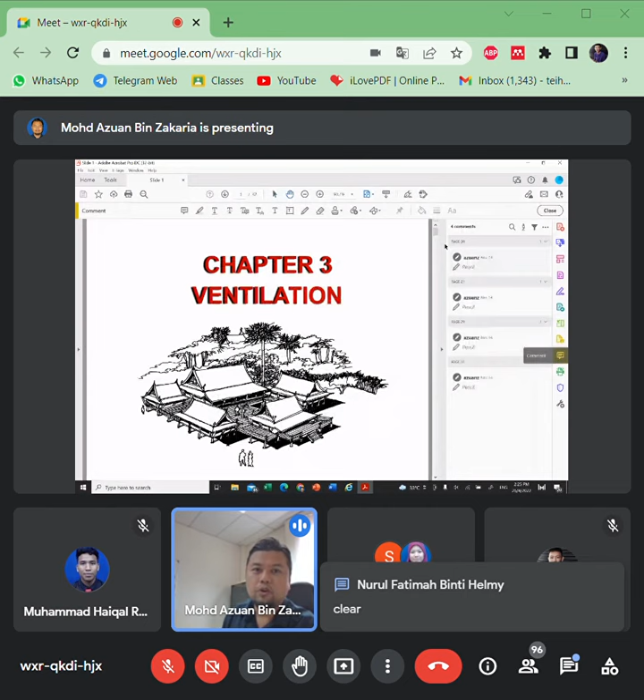Okay, chapter 3, what you have to know is basically about, if you already see the video, is okay, maybe you have the clue sikit. Chapter 3 kita ada 3 sebenarnya: indoor air quality, natural ventilation, and mechanical ventilation. Plus inside mechanical ventilation, we will learn briefly about air conditioning system. Hopefully you can do revision between today or tomorrow evening, these two lah.

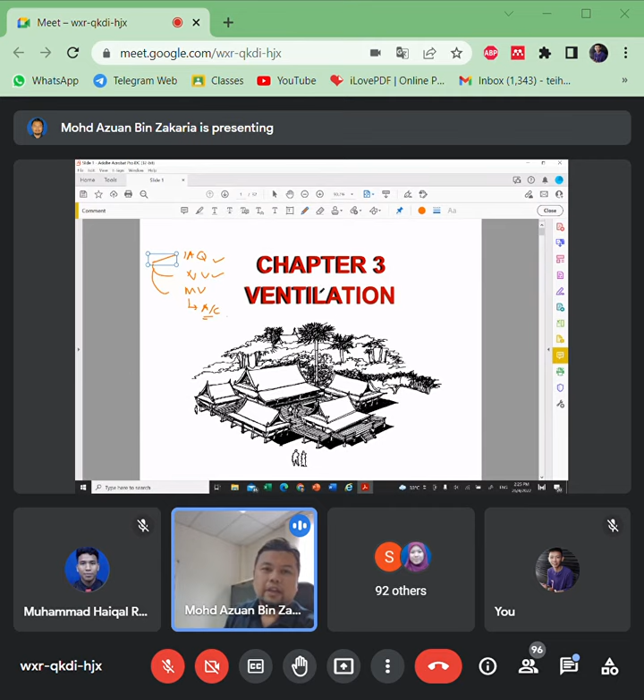Okay, I go through briefly about indoor air quality. As I mentioned before, we as humans need a building as an envelope, a tempat perlindungan. But when we live in the building, what we want to do is make sure we have a comfortable and healthy life. We want to be comfortable and healthy.

One of the factors that can ensure we are healthy inside a building is the air quality of indoor air. The quality of indoor air will affect your health. Therefore we need to make sure the IAQ or indoor air quality is very good, to make sure it will not bring side effects to us, because normally we will stay for a longer time. You can try to calculate how many hours you stay in a building, more than 8 hours per day, or in a specific room maybe more than 5 hours. So if you are exposed to not good or polluted air for a long time, it will affect your health, maybe your skin, for example some irritation, maybe the air has some toxic. So we need a good indoor air quality.

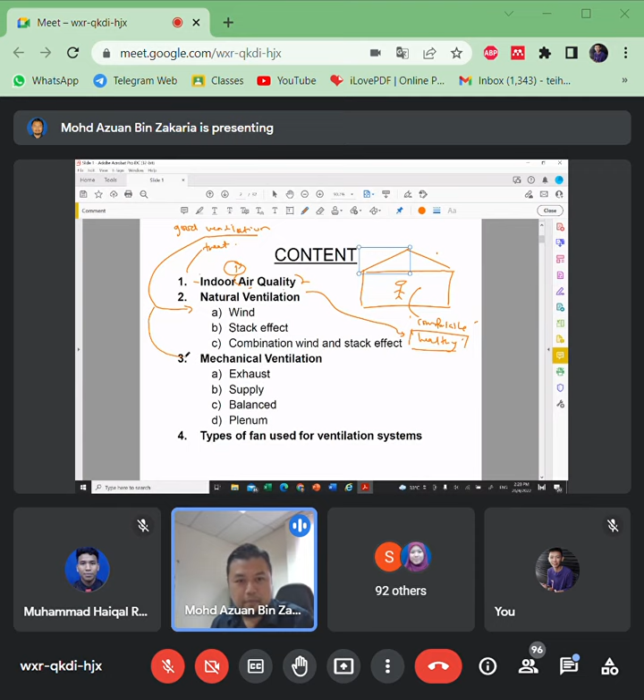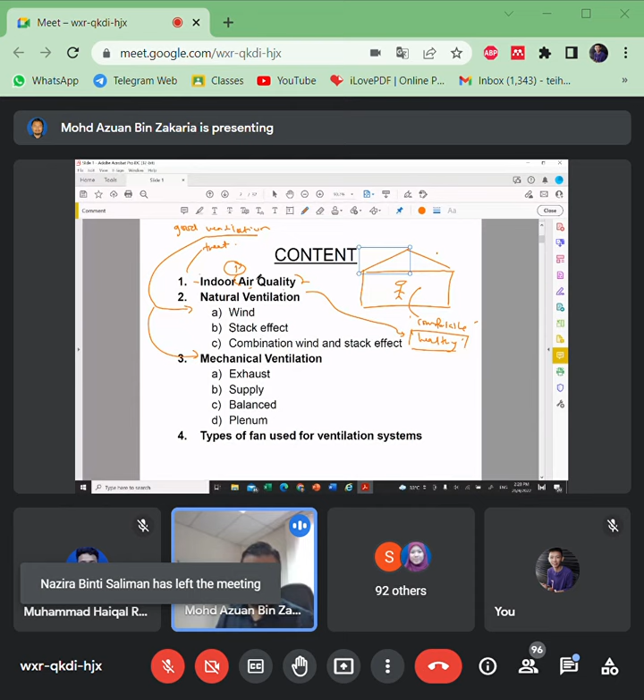That's number one. To provide good indoor air quality, of course we need to treat the air, and also we need a good ventilation, to remove the pollutants. Meanwhile, ventilation itself we can obtain by two methods: natural ventilation or mechanical ventilation. So now you understand the purpose of ventilation, to provide good indoor air quality. Today we will go to natural ventilation first.

Okay, the importance of ventilation. Firstly, to maintain thermal comfort, as mentioned before, control of thermal comfort is related to indoor air temperature and relative humidity. Number two, to provide fresh air for your health. And lastly, an additional function of ventilation is it can cool the building mass and interior space.

Ventilation is for thermal comfort, for fresh air, and at the same time, if the air flows towards the building structure, it can remove or release some heat. So some heat can be removed by ventilation, and therefore it can be used to cool the building mass.

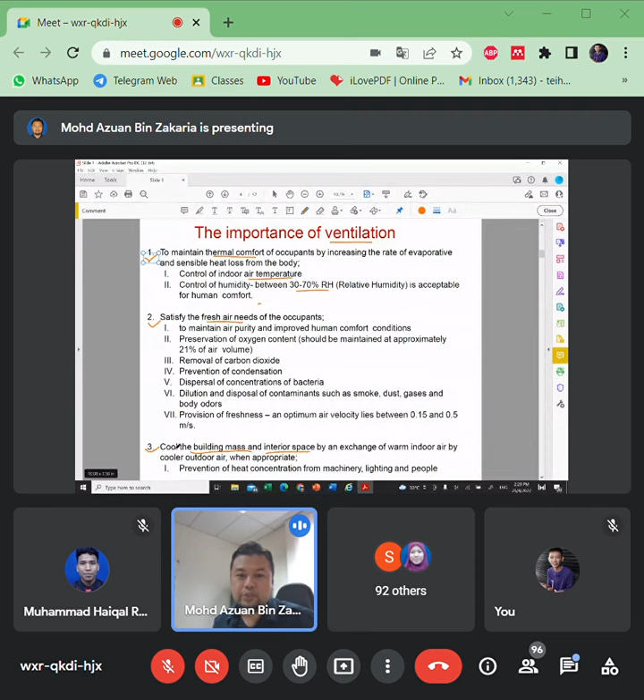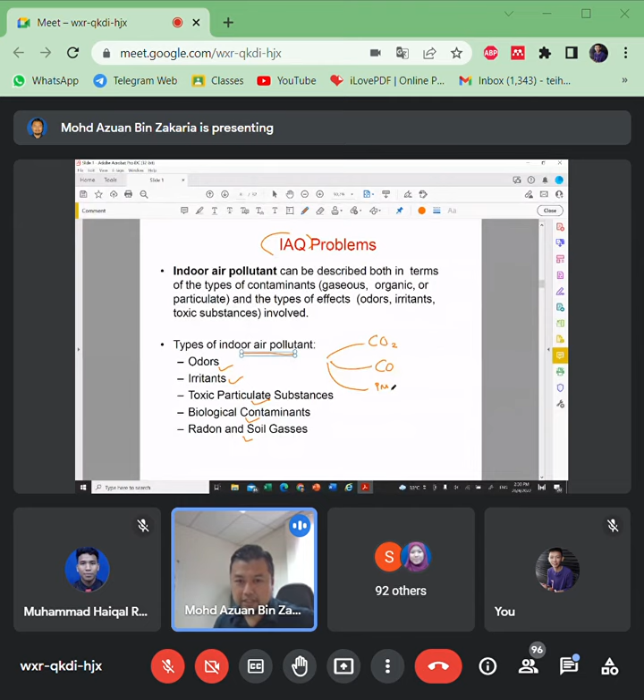Indoor air quality is normally affected by indoor air pollutants. This can include odors, irritants, toxic particulate substances, biological contaminants, radon gas, or other parameters we always check in IAQ, such as CO2 level (carbon dioxide), carbon monoxide, and particulate matters like PM10, PM2.5, and PM1.0. There's also VOC level, and many others.

So indoor air quality, only... okay, good, yes.

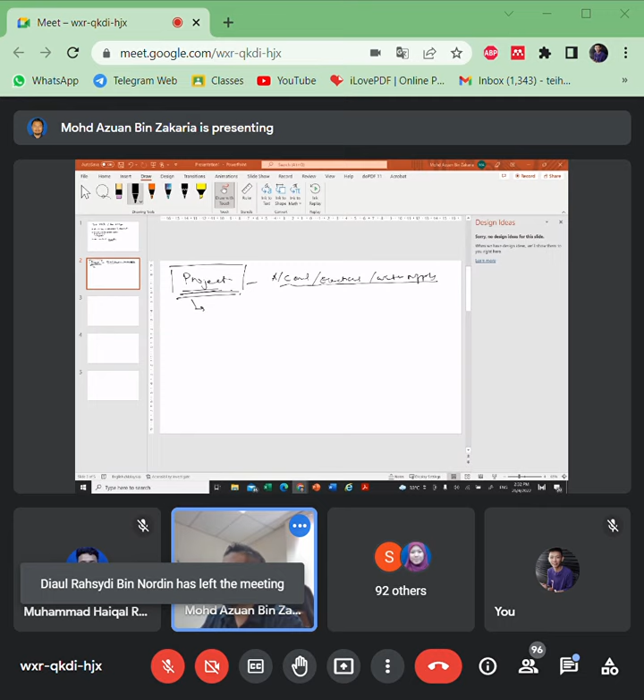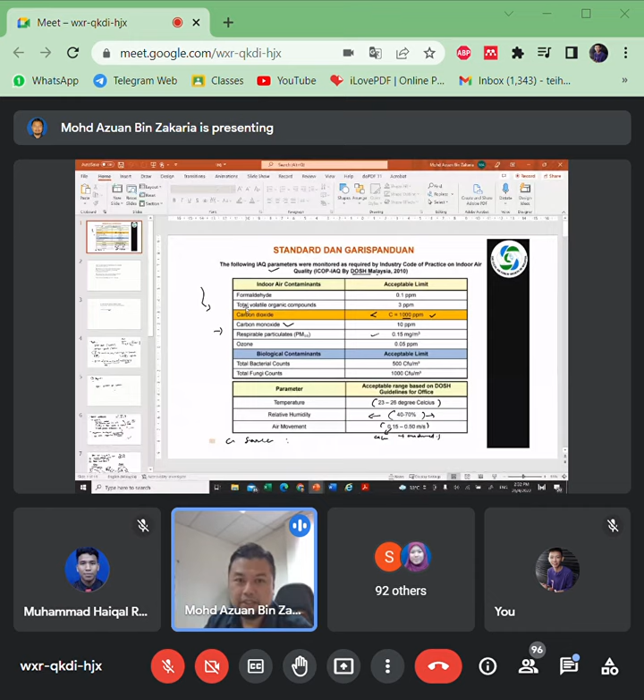This one. So we are talking about indoor air quality, which is caused by indoor air contaminants. Every indoor air contaminant or parameter has its limit. For example, CO2 has a limit, and VOC, volatile organic compounds, has a limit. This example is by DOSH Malaysia.

If you're interested to observe the level of pollutants, maybe you can purchase some sensors. Normally, let's see, carbon dioxide recommended is less than 1000 ppm, parts per million. What is normal outdoor CO2 level? If you have a sensor, some labs have sensors, normal outdoors is around 400 to 500.

Normal, if using natural ventilation, maybe 500s. Then, because of human activity, human respiration, and some equipment, indoor CO2 levels may slightly increase, slightly higher than external, but we have to control this to be less than 1000, because more than 1000 it will affect health - for example feel tired, dizzy. If exposed to more than 3000 ppm CO2 for more than 5 hours, the person may become nauseous, dizzy, pening kepala. This is also a cause of sick building syndrome.

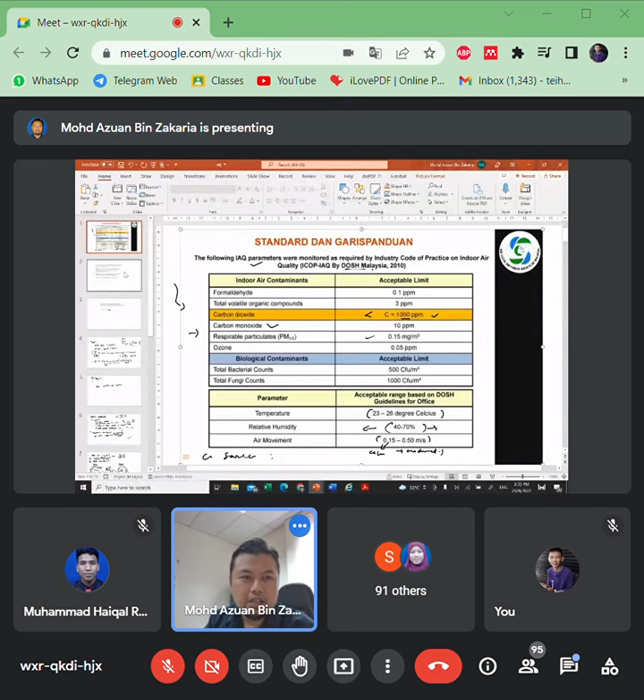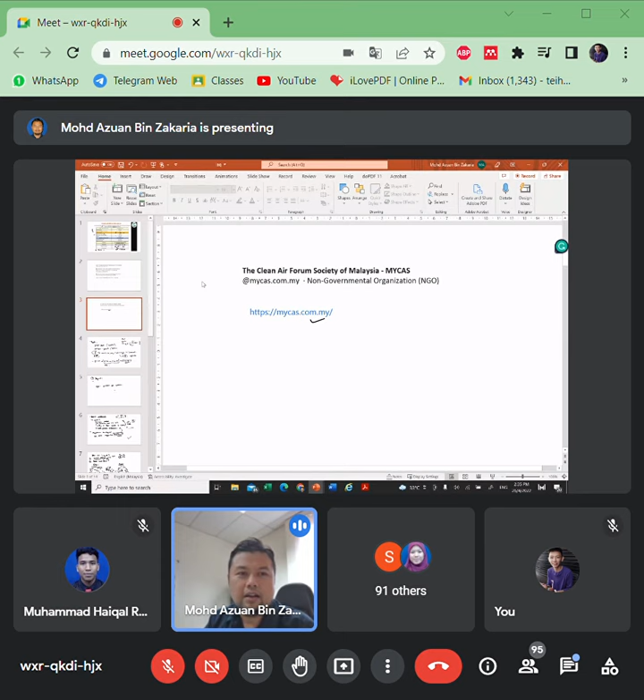Okay, let's continue and look at the main categories: odors, irritants, and so on. Odors are unpleasant smells. If too much, it can come from humans, grooming products, copy machines, and so on, making us feel uncomfortable. One solution is to increase outdoor air supply - we need fresh air supply.

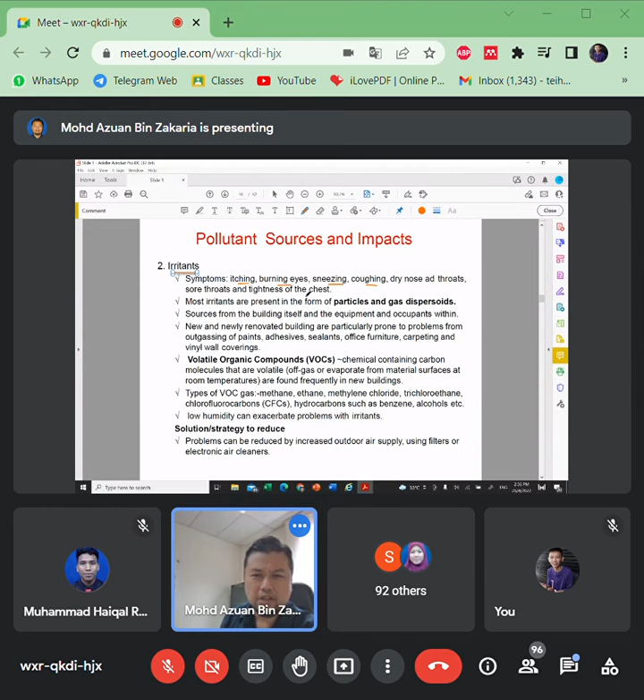At the same time, the internal air should be removed. Then irritants: symptoms include itching, burning eyes, sneezing, coughing, dry nose, sore throat, and so on. Most irritants present as particle and gas dispersoids, normally small particles - particulate matters. Depending on size, some particulates can go into our nose, eyes, and so on.

One of the particles is VOC, which is a chemical containing carbon molecules that are volatile - toxic chemical gas, not healthy for our health. It can evaporate, which is volatile, from material surfaces at room temperature.

Frequently found in new buildings because of paint, or from furniture, or from perfume. The problem can be reduced by increasing outdoor air supply, using filters, and electronic air cleaners.

Then we have another thing: toxic particulate substance. Some materials have toxic particulate substance, such as previously the introduction of asbestos. Asbestos has already been banned worldwide - it should no longer be used for commercial and residential purposes, because asbestos has toxic particulate substance. However, still in Malaysia, I believe there may still be illegal sale, or some shops where asbestos products are still available.

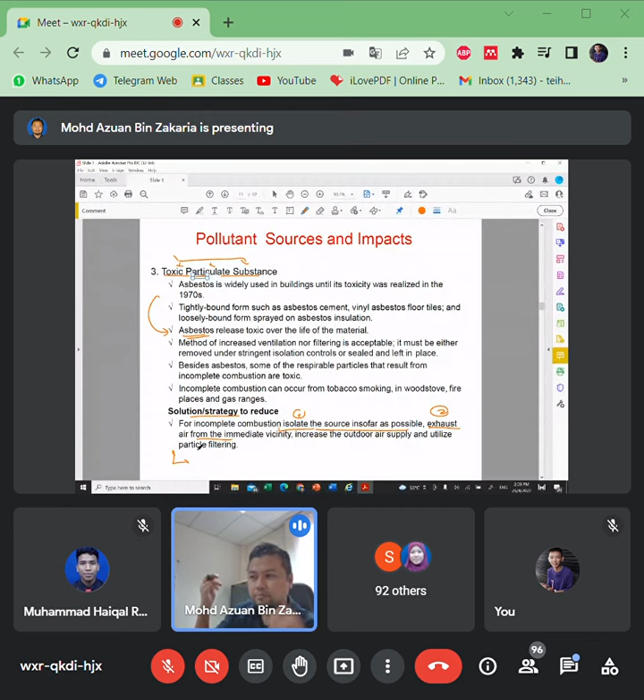Just in case, if you find some videos on how to deal with asbestos outside in different countries, they even use full PPE to remove asbestos.

Next, biological contaminants such as bacteria, fungus, virus, algae. These biological contaminants are normally related to humidity in the building, because of moisture. Virus and fungi will thrive in conditions where RH is more than 70%. 70% RH and above is a good place for them to grow.

Mold and so on. So one of the strategies to reduce these biological contaminants is to make sure the RH should be within the recommended range, maybe 40 to 65% RH.

Number 2, exposure to ultraviolet radiation. Recent technology lets you use UV light to kill fungus, virus, and algae, but you need to read the instructions, because for the usage of UV light, we need to know how many times of exposure is required. It's not like you just expose it to UV light for 1 second and remove it. You have to read.

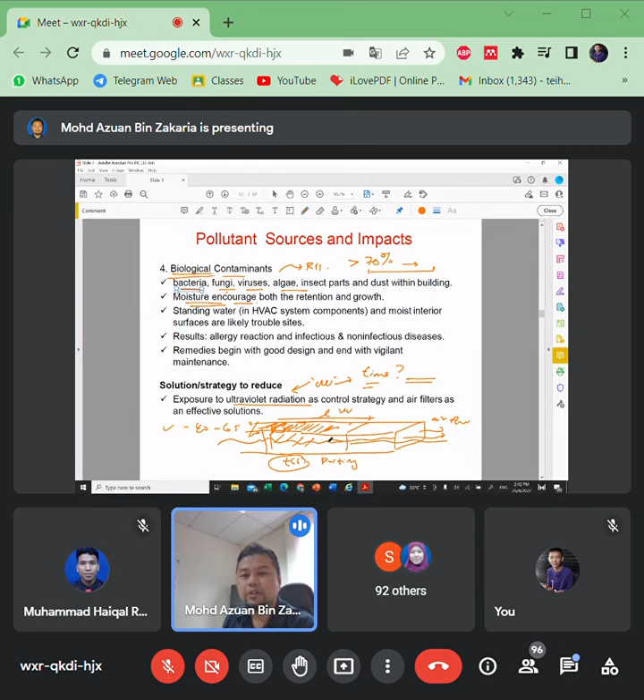How do you expose the air for a certain time? They need to provide a certain length of UV light, so that when the air travels through, it travels for some time before it can be released. So this time is required - how much length is required for the air to be treated, so that the required time is achieved.

Last but not least is radon and soil gas. Honestly, I'm not so familiar with this, but they say radon - some dangerous gas - is released underneath the ground. We need to be careful to check whether the underground level has some source of pollutants or not. Radon is a radioactive gas that decays rapidly, releasing radiation at each stage.

It's colorless and odorless, so we need to prevent it. To prevent penetration from below ground, the space, wall and floor should be both minimized and well sealed. So basically, if there is ground and a house, we need to make a very good seal, and provide prevention layers between the ground and the building.

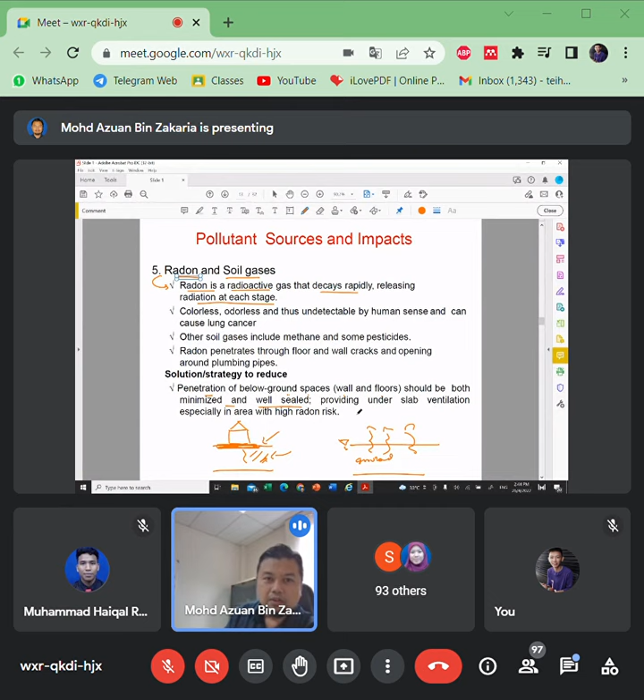This applies if we have no choice but to build the house or building on polluted ground. That's basically a brief overview about indoor air quality pollutants. So what we have to do is make sure all the contaminants are within the allowable range, to control them.

So there are many strategies, for example improving ventilation, the arrangement of the room, and reducing the density of people inside the room. There are many strategies, but to discuss specific strategies, we have to further check journals or standards.

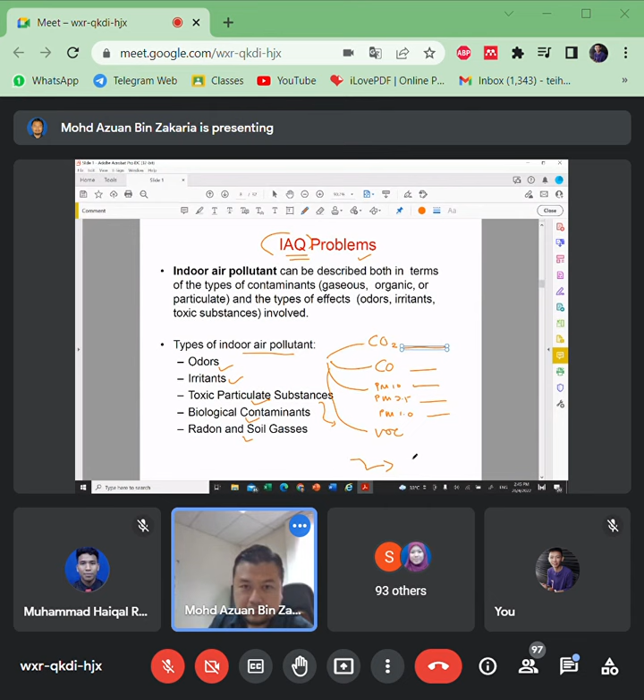Second thing we have - alright, 45 minutes left, maybe 30 minutes left. Let's look into natural ventilation.

Is there anyone who wants to share what you understand about natural ventilation?

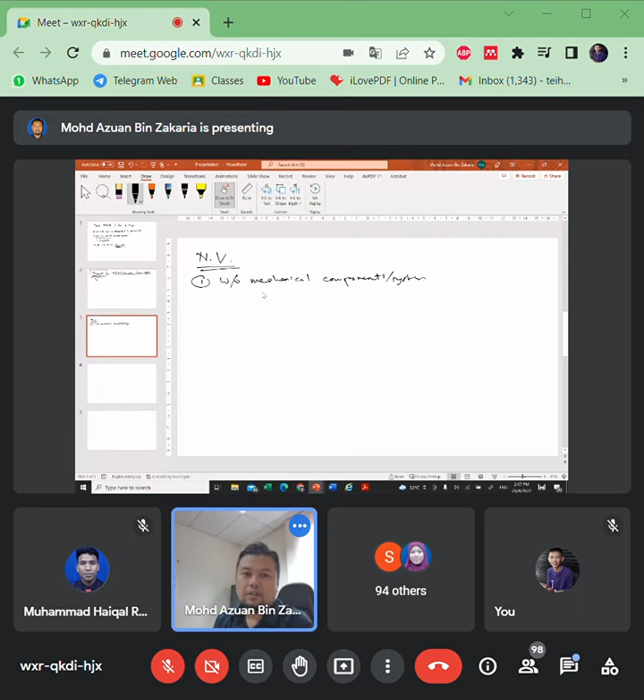So we have: without using a mechanical system. Natural wind. So natural ventilation firstly is without mechanical components or systems. Number two, if it's natural wind.

And then there's weathering - weathering, correct, lulu hawa. And then we have pressure difference - good, pressure difference, flow of air due to pressure difference. We have two votes: external air, fresh air from external. Okay, I think you're already okay.

Very good, very active. So we have several answers, I think it's enough to be discussed. Okay, so basically, in my opinion, we can give two keywords.

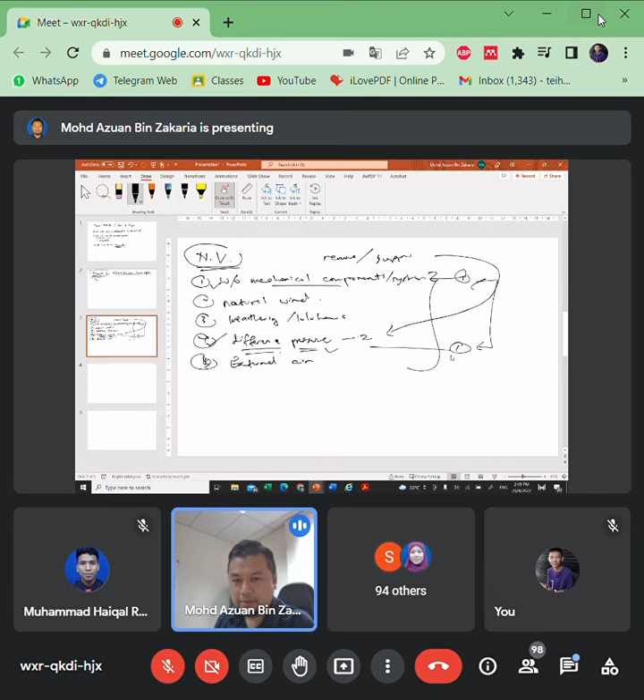So thank you for your response. I can say that one keyword is to remove and supply air without mechanical ventilation. Then the process itself is based on pressure difference. So without mechanical ventilation, but the process is caused by pressure difference. For me, natural ventilation is ventilation caused by the pressure difference inside and outside the room. These two keywords I can accept, but for me the best one is this - pressure difference.

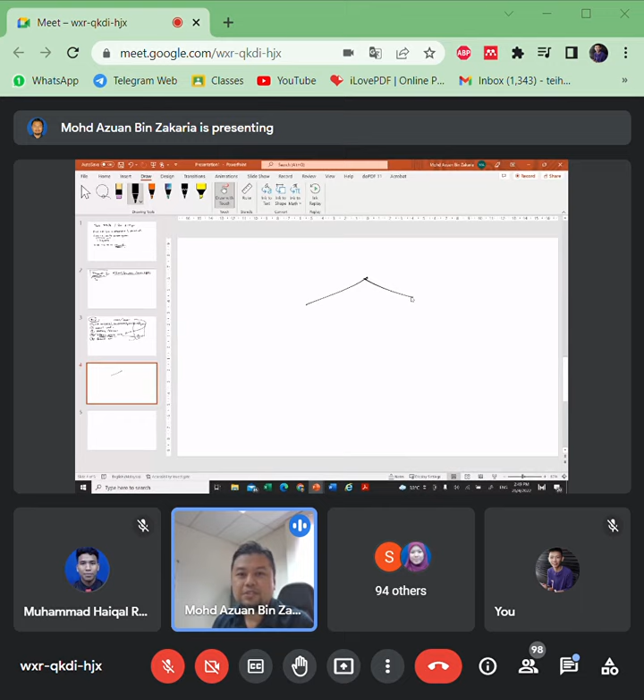Natural ventilation happens due to pressure difference, because as I mentioned in the video, because of the difference in pressure, the air can flow. As I mentioned before, if we have a house, to make sure the air can flow inside, we need to make sure the pressure outside is bigger than the pressure inside. If pressure outside is equal to pressure inside, there will be no ventilation. Even though the outside air is very strong, if the pressure inside the room is also very strong and creates equality, there will be no ventilation.

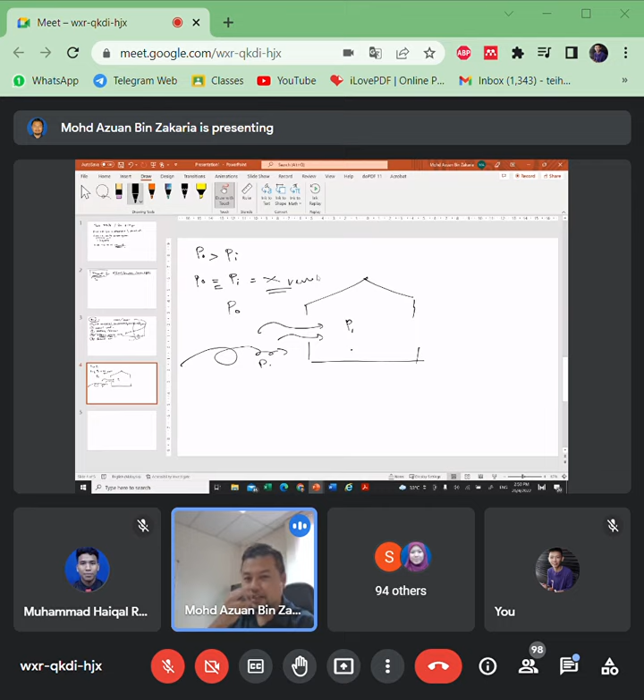So this pressure difference is by wind force, right? By wind force. There is another thing - pressure difference by temperature. How does pressure difference get affected by temperature? This is related to stack effect. As I mentioned in the video, stack effect normally happens in very tall buildings.

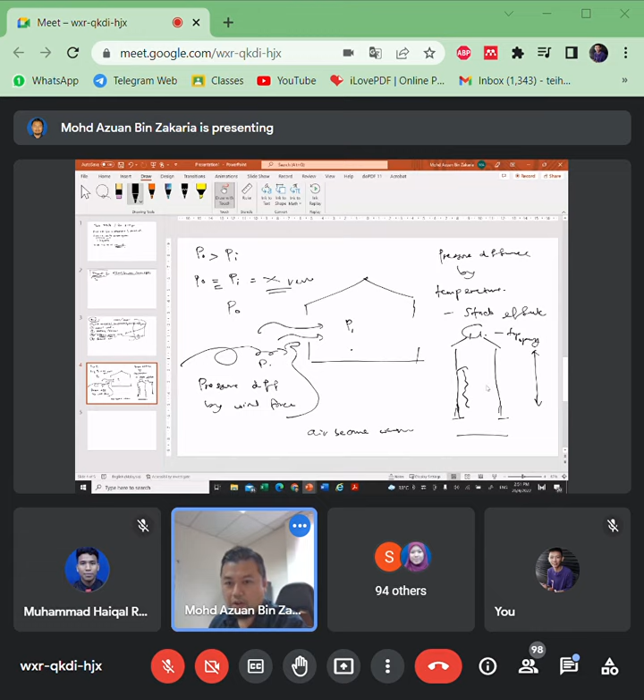If a tall building has an opening at the top - a tall building with an opening at the top - this can create stack effect due to pressure difference. Because, as I mentioned before, when activity happens, the air inside becomes warm. The warm air, having less density, will rise up. Then cool air, for example from outside, will come in - when the warm air rises, it leaves some empty space, meaning the density there is low, so the heavier air can go inside.

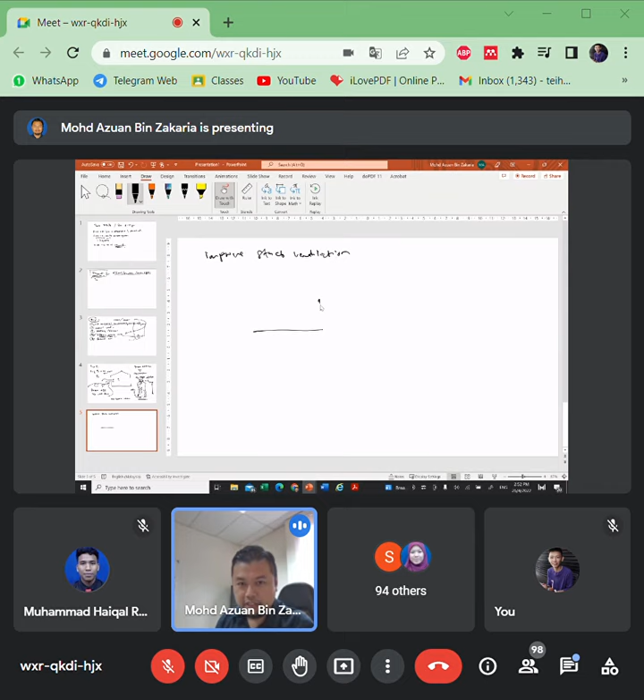So slightly cold air comes in, and the hot air, if we provide some opening up here, can be released. There are some strategies to improve stack ventilation. Because of the difference - sorry, let me draw this - stack effect: some activities happen, so stack effect happens. Imagine stack effect happening here, caused by temperature difference.

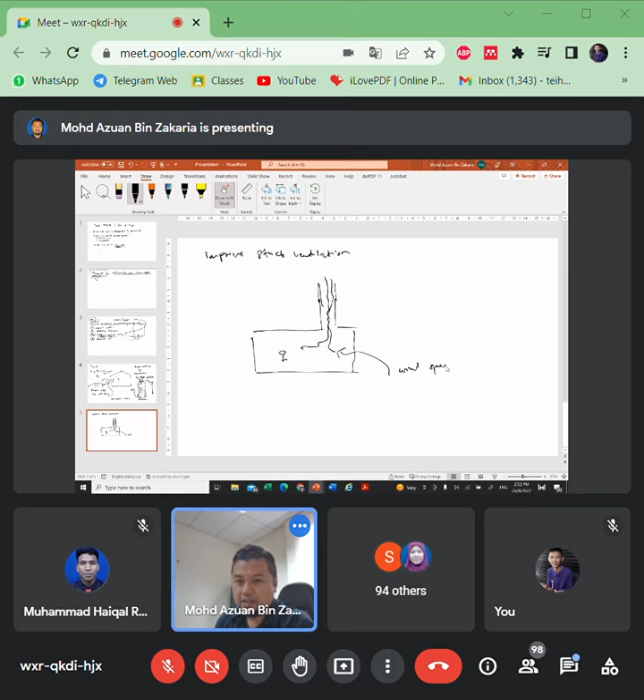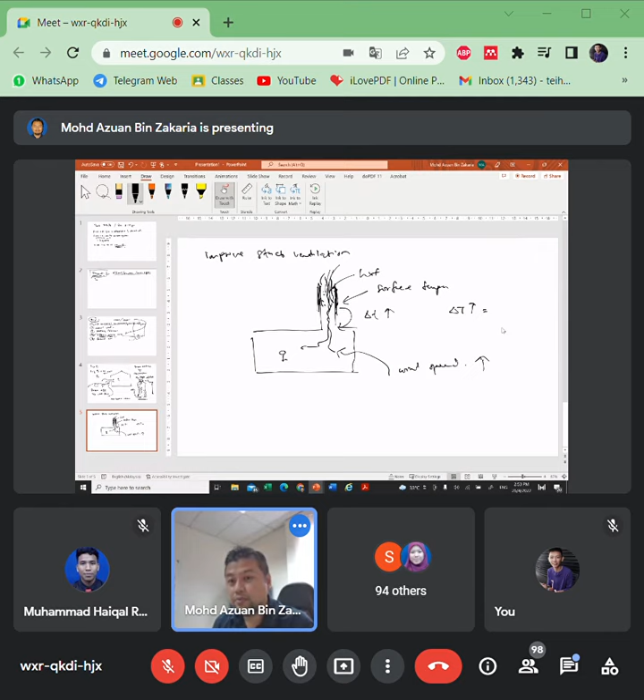Some countries have done research - this stack effect has some wind speed. They believed they could improve the wind speed by increasing this tunnel, increasing the surface temperature. They put a heater here to make sure this area is hot, which makes the air here hotter so it can be removed faster. When they create a higher surface temperature here, the temperature difference delta T becomes very high. So in stack effect, when the temperature difference is bigger, the wind speed will also increase. That's how they manipulate it.

Okay, and then the best way - do you still remember the limitation of stack and wind flow?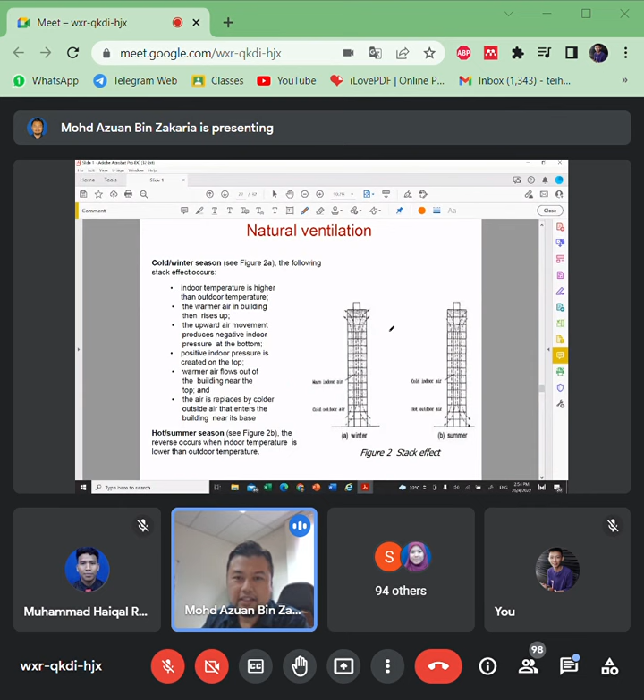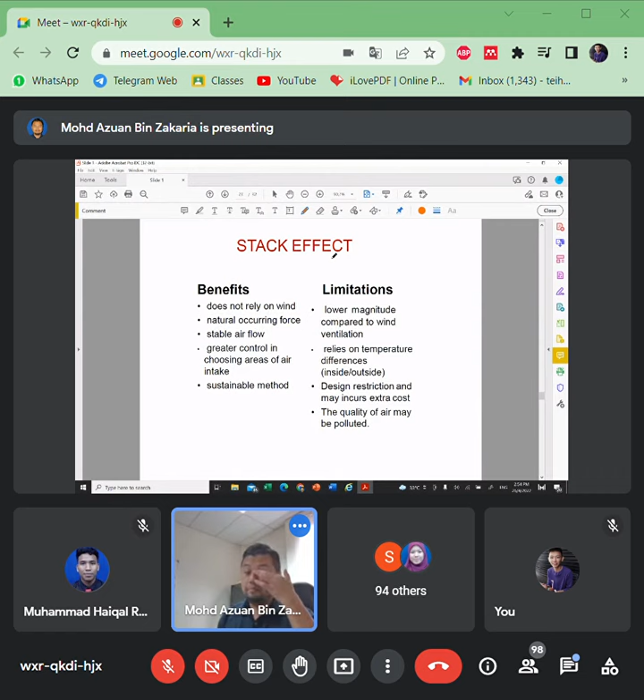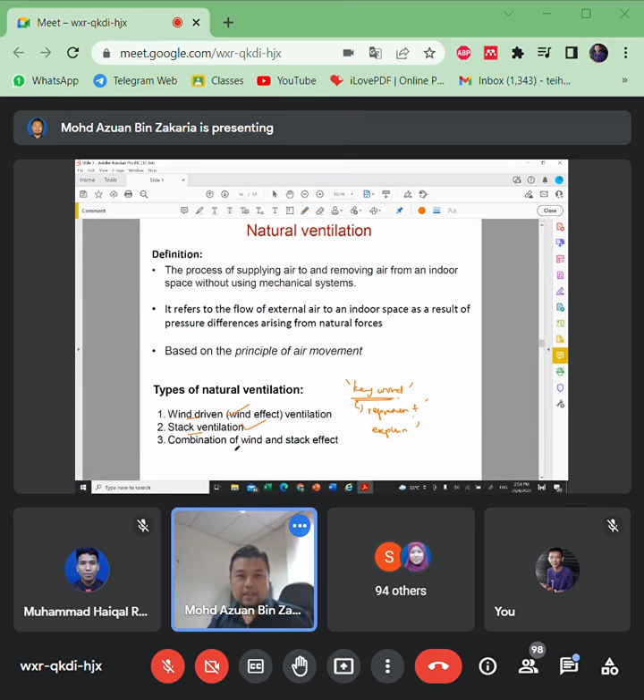Okay, to know the limitation and benefits, you need to understand how these two work: the principle of wind-driven and stack ventilation. If you understand properly, you will know how to solve the problem. I hope that is basic information, but what I want to discuss is how to maximize these factors.

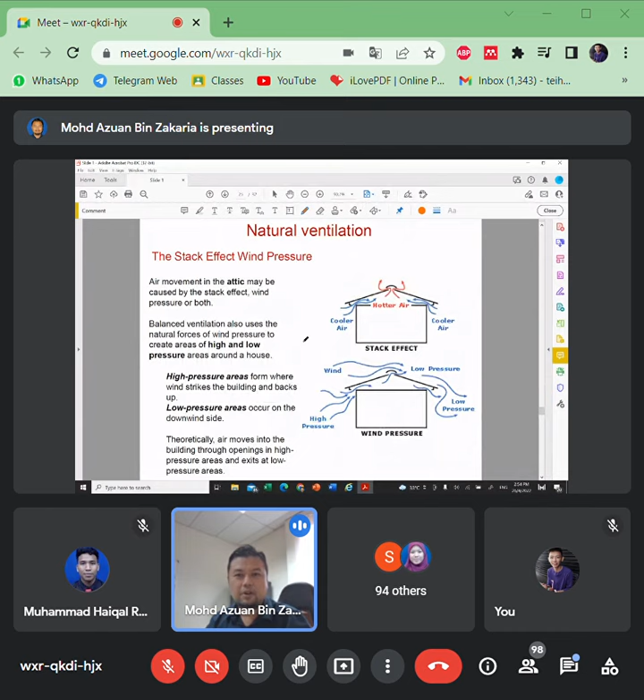Let's say one more thing: combination of wind and stack. The best way to use natural ventilation is by combining wind and stack effect. Especially in our hot and humid climate, we cannot depend on stack effect alone, because the temperature difference outside and inside is not too big. For example, during daytime, external air temperature is 36, but internal maybe 29 to 30, so the difference is only 6 degrees Celsius.

Similarly at nighttime, outdoor temperature maybe 25, and internal temperature maybe 28 in case of using natural ventilation, or 27. So nighttime temperature difference inside and outside is about 3 degrees Celsius. Both of these values are less than 10 degrees Celsius. If you check literature review, previous research recommends a temperature difference for effective stack ventilation. Some researchers said the best way is to obtain more than 10 degrees Celsius difference, then it can be more effective.

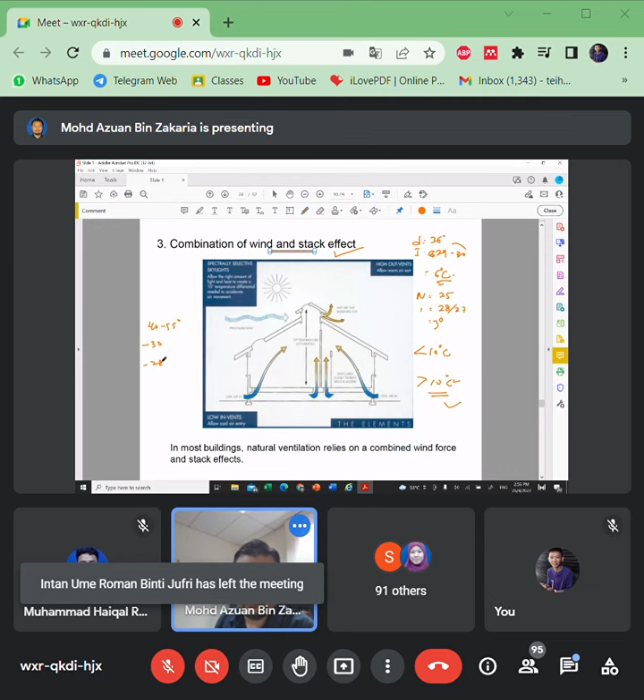So where is this place? If you look into Middle East countries, the outside temperature is 40 and up to 55, and internal temperature maybe 30. So they can obtain more than 10 degrees Celsius. Similarly at night, indoor temperature maybe 25 to 28, but outdoor temperature maybe 15 degrees Celsius during nighttime. So they have significant temperature difference during daytime and nighttime, and that condition can use stack effect properly.

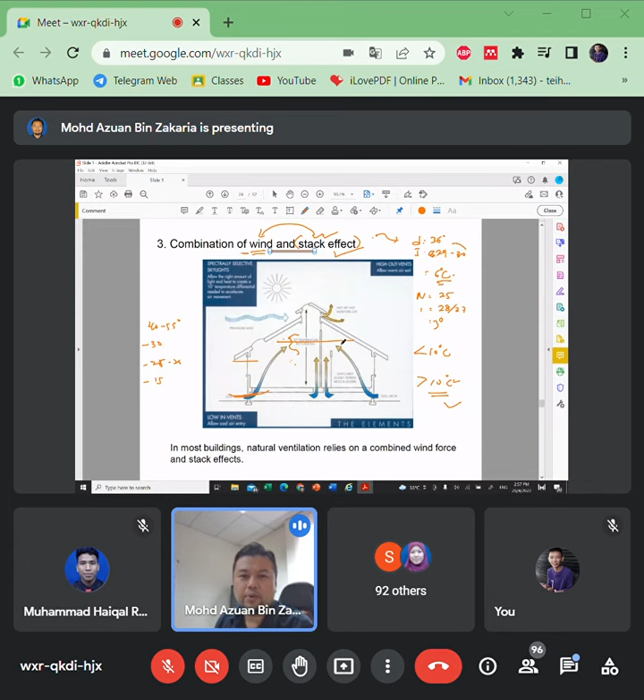But for our country that has a smaller difference, we need to combine. Some cases, some conditions, stack effect may be effective, but most of the time we depend on wind flow. So wind flow we will obtain by the lowest opening as possible. We try to obtain the lowest air possible, and then the hot air, especially when we do some activity, the hot air will rise. Normally hot air is caused by the attic area itself, so if we have some opening here, the hot air can be released.

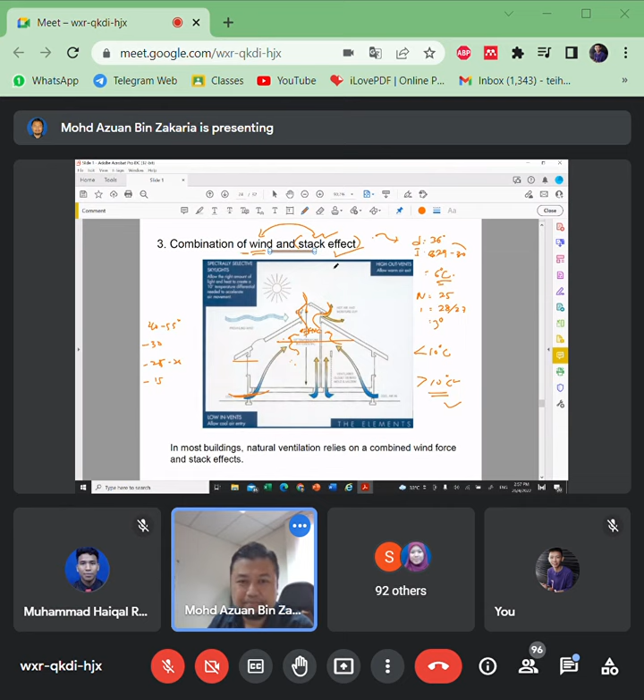Now the important thing is how to use natural ventilation. My second question is, now due to climate change happening, and it's already 2022, I just want to get your opinion - is natural ventilation still relevant in Malaysia?

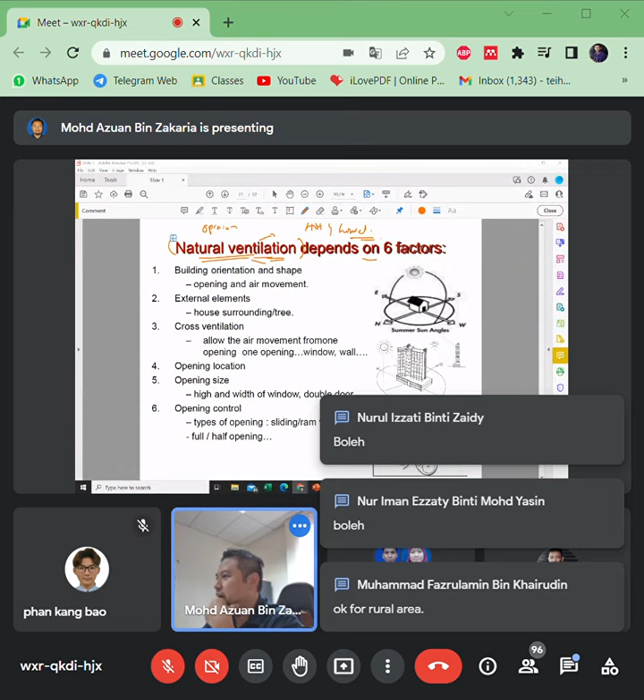Then Afiqah, yes, since it also helps to reduce electricity. Okay, can use. Everyone agrees natural ventilation is still relevant to use, which also can reduce electricity usage.

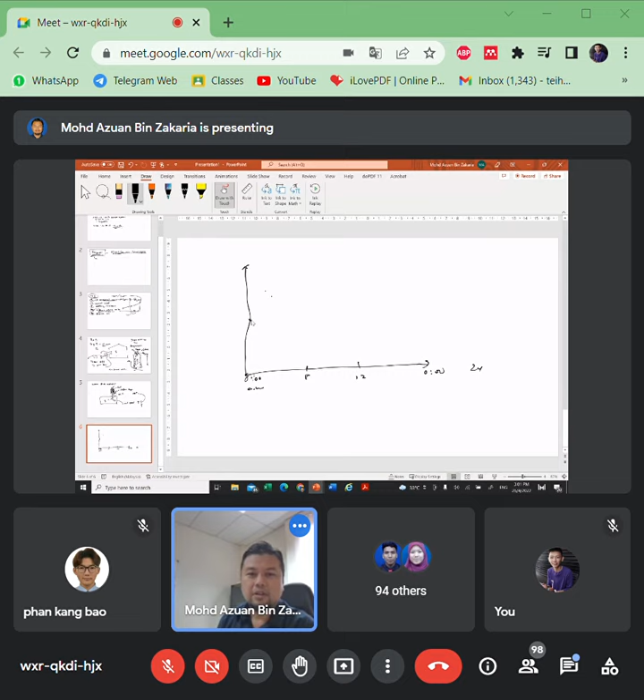If we do some measurement, if we put some sensor inside the house from 12 a.m. to 12 a.m., so 24 hours, the temperature will - for example this is 8 a.m., this is 12, right, 12 a.m. it will reduce until 7, and then at sunrise temperature will increase, and then go down again.

So in 24 hours, actually some of the time we can identify when to use natural ventilation, such as during nighttime. We can use natural ventilation, and maybe somewhere not at the peak temperature but after that. But the best way is, if no choice, we have to use aircon during the critical time, especially in office. But the rest of the time, evening and nighttime, we can use natural ventilation.

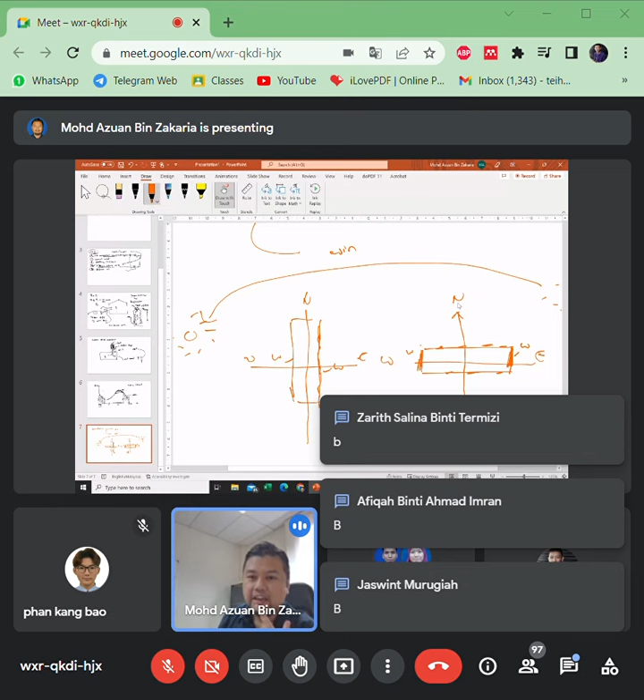A and B, which one will absorb much solar radiation inside the house? Rasa-rasanya yang mana, A atau B? Keadaan manakah yang akan absorb more solar? This one is elongated east to west, this one is elongated north to south. Okay, mostly said B.

Okay, bijak. Why B? Kepada yang tak faham lagi, what is the problem? Orientation affects because in our daily life, the sun will rise from east and set at west. So the area facing sun, the area at east and west is the most exposed area to the sun daily.

So if the wall has a window, it makes it easier for the hot air or radiation to infiltrate the house. In this condition, only a small wall is exposed to direct solar radiation. Of course north and south are also exposed, but the intensity, exposure time, and exposure angle are not as severe as facing east and west.

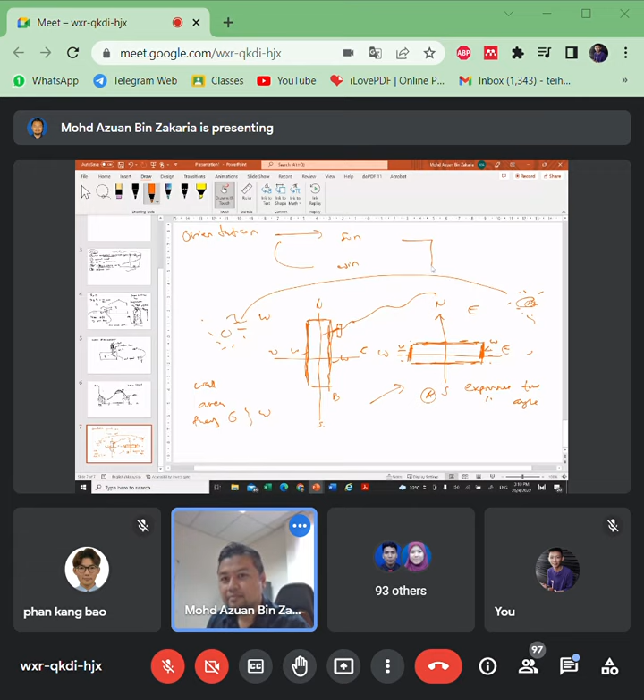So the best way in green building design, one of the strategies to reduce heat transfer in a building, is to try to minimize windows facing east or west. But this doesn't mean you cannot do a window. Maybe you can make a window, but you need to provide overhanging, construct a window in that area but provide some overhanging.

Overhanging wall, shade, provide some shades, still okay. If you have no choice, the house is already like that, or you purchase a second-hand house. Okay, just in case, during facing east, morning and evening, which one is more severe solar radiation? Pernah rasa tak solar radiation, panas matahari pagi ke petang yang panas, yang sakit?

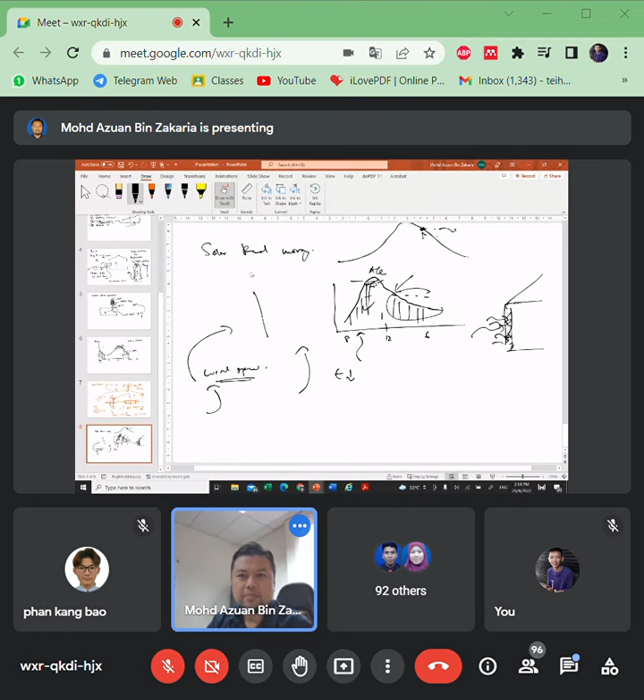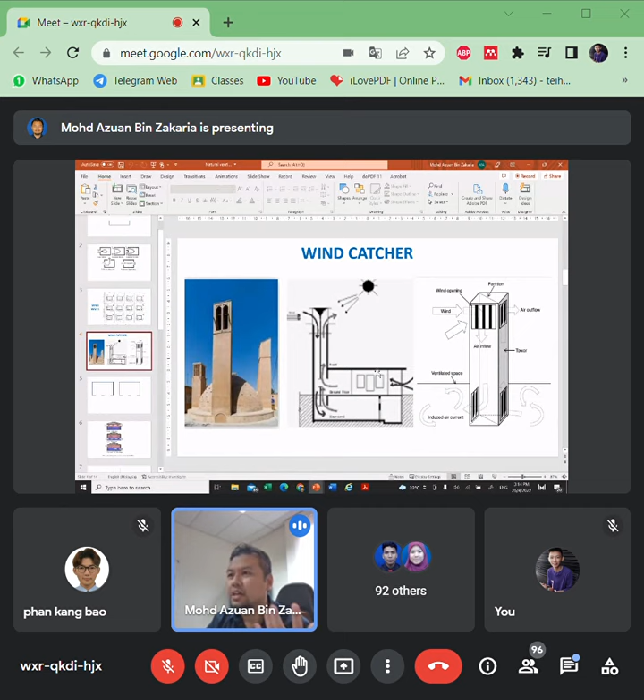Shape of the building will also affect. As in my previous slide - shape, contoh shape macam ni. Kalau shape ni, sama ada kita boleh create the shape of the building to be a wind catcher, to be a wing wall to catch the wind.

Sometimes, as in my previous research, I checked the effect of flat roof, slope roof, and partial slope roof - one simulation I checked. So how is the airflow, if this terrace house is like this, how is the airflow? My research shows that the conventional one is much more better to create some airflow within, because terrace houses are rapat-rapat, and we have windows at the bottom.

So which shape of building or roof will enhance, can improve ventilation at the window level - the roof shape effect will give this. But there are certain setups where certain researchers prefer this one, it depends on the setup, on how they face each other. But what I say is the roof itself can affect.

And then external element, cross ventilation - I think in my video I already have this. Opening size, control, and so on.

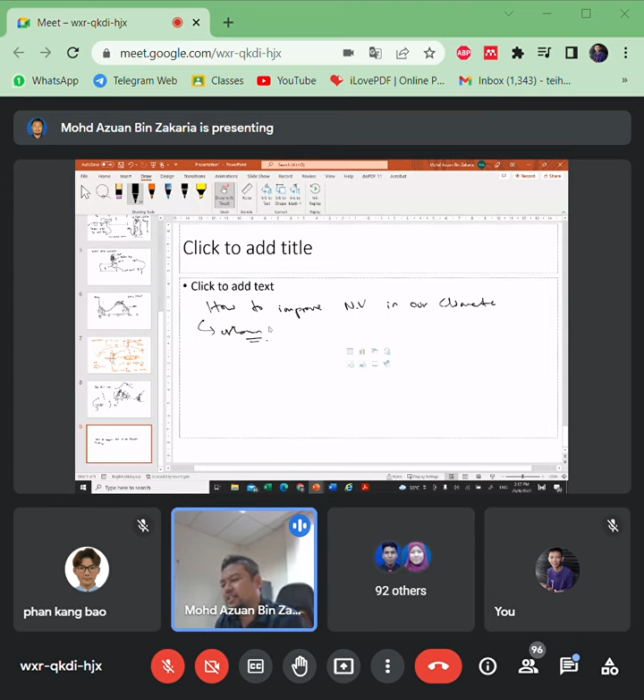So what do I want to ask? General question: how to improve natural ventilation in our climate, or in urban areas? So in our country, in the houses, in the city, what strategy can be done based on these things? Can you provide some ideas? Okay, maybe I give you 5 minutes - we try to stop at 3:30. Okay, 5 minutes, so you can write down or share directly. Based on this information, try to think of the best way to improve natural ventilation.

Okay, any ideas? No ideas? Okay, I just want to mention - in terms of practice, I think you can try to think about it.

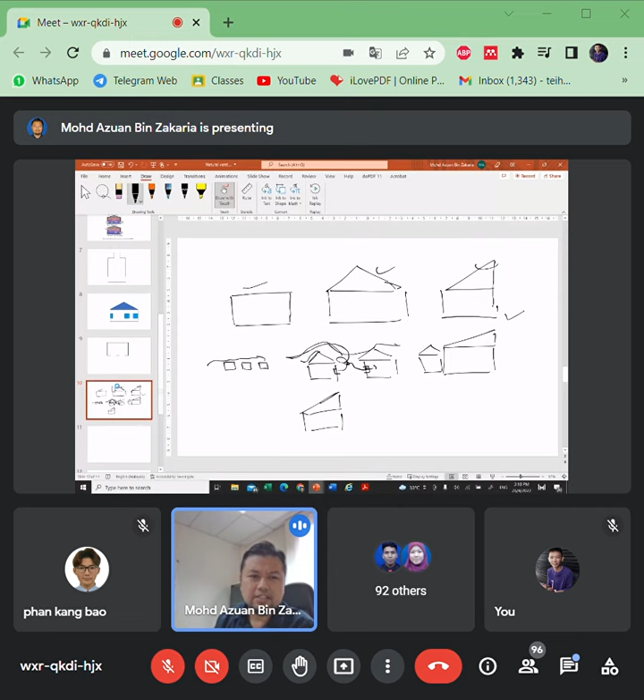What I want to share is the impact of cross ventilation, the impact of external elements, cross ventilation, opening size - control maybe is a second thing. Cross ventilation, if available, is very recommended. Cross ventilation works like this - air enters one place and it can create a flush through the internal space. So cross ventilation is always better than single sided if possible. Try to create a cross ventilation condition in your house.

For example, to use night ventilation, maybe you can open the windows from 8 to maybe 9:30 p.m. - so maybe 1 to 2 hours only.

During that time, make sure you have good cross ventilation. After that, when the temperature has already gone down a bit, you can use aircon. So we can say that you pre-cool the indoor air by using natural ventilation first, and then after a certain time, when you use aircon, the loading will be much lower.

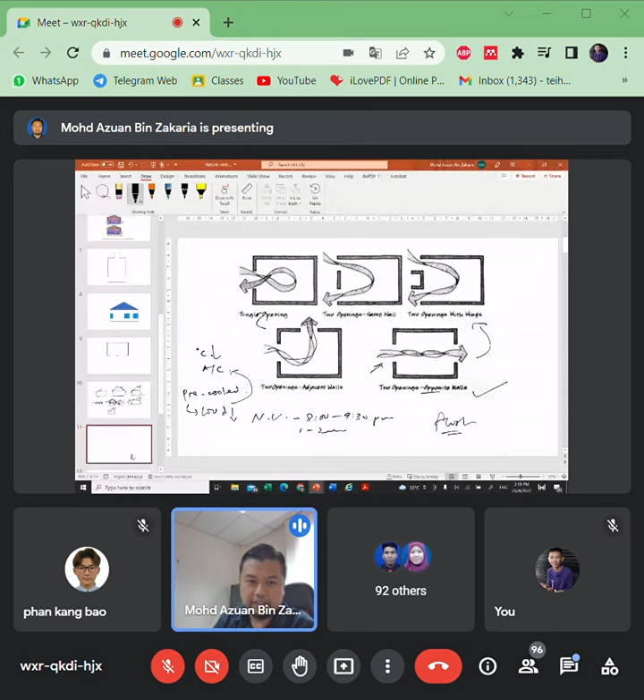To get a very good cool air during daytime ventilation, how do we get cool air? The air itself should be shaded. You can combine it with water to create a mist. So, shaded - how do we shade the air?

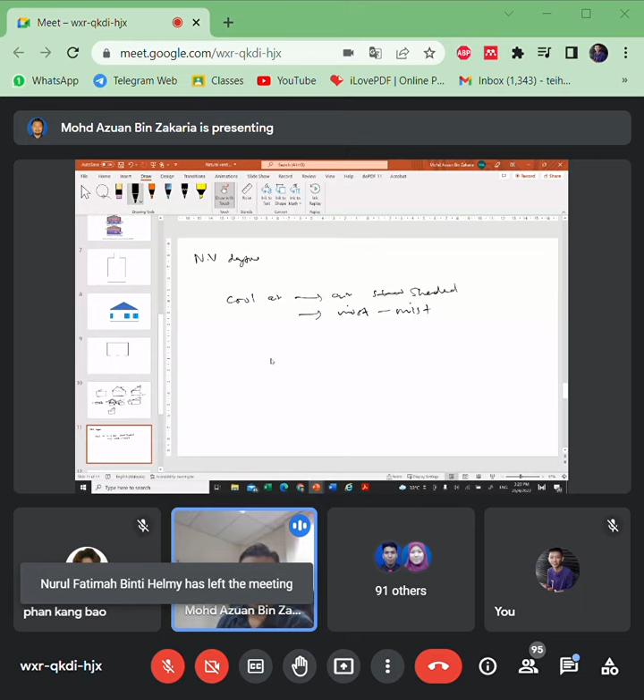We can use landscaping, for example a canopy. The recommended type is a canopy tree. Why? Imagine this is a house - a canopy tree is normally very tall and has a big bush of leaves. It's tall and doesn't obstruct the wind speed. At the same time, it provides shade, and it provides a slightly humid condition which will cool down the airflow.

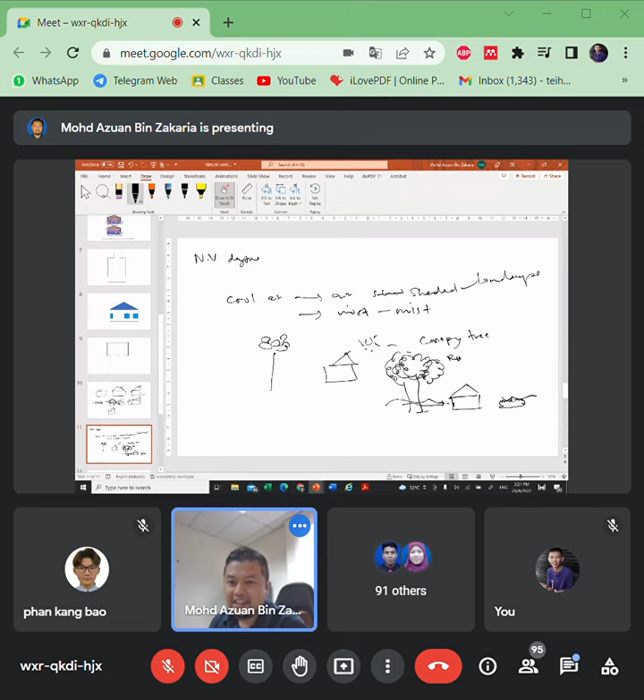Meanwhile, short bushes or small plants are good for the eyes and for decoration, but they will actually restrict the airflow. So if your house has many small plant trees, make sure they don't obstruct your windows or wind flow.

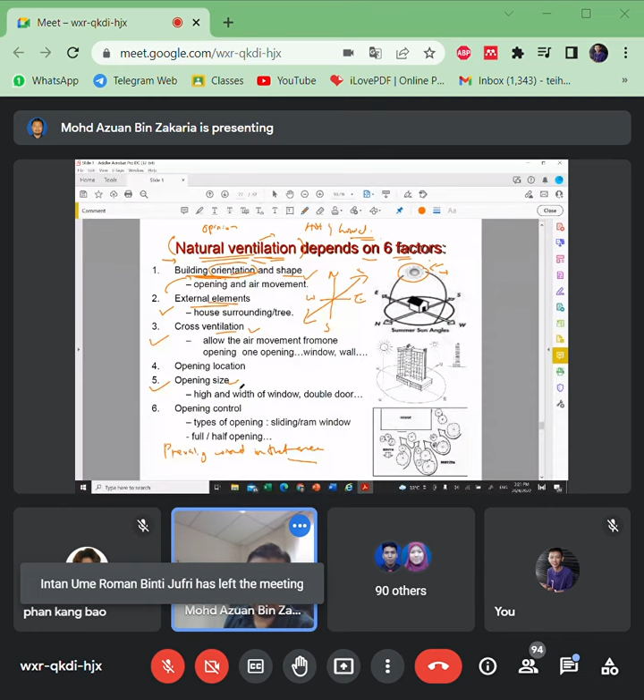What else? Opening size, of course. If you want a good amount of airflow during daytime, the bigger the opening, the better. Opening location also needs to be considered - there are many ideas and concepts now.

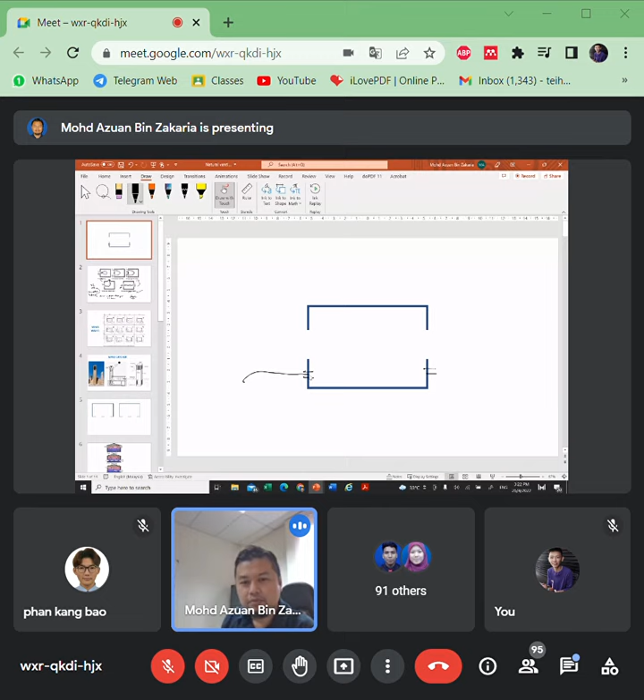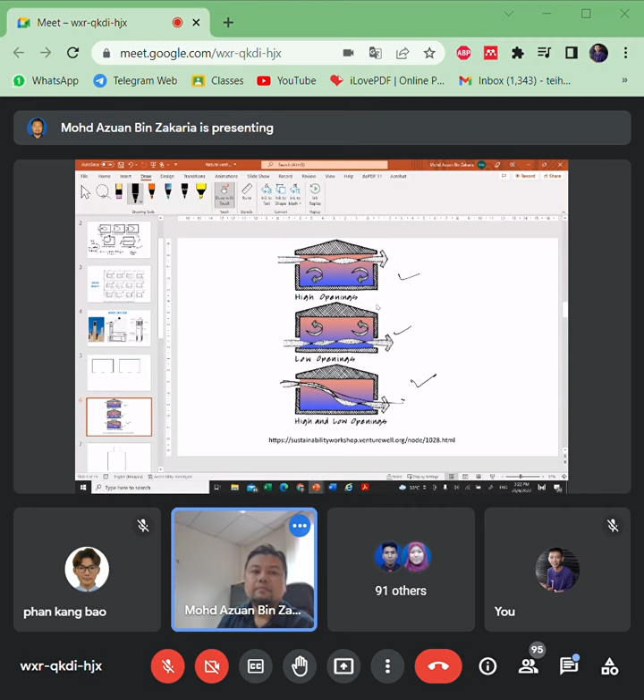Previously the question was about cool air - how does it work? Imagine this here has an opening. During that time, cool air normally comes from the bottom or low area. The low area is the way to get cool air, while the top opening is the way to release hot air. This is possible, but a combination of both is also possible.

I think that is all. Do you have any questions about natural ventilation? So the keyword again to improve natural ventilation is to create pressure difference - the bigger the pressure difference, the more it will enhance airflow into the house.

No questions, everything seems clear with my explanation today and the examples and video I've given. I think it's okay for basic information. For further strategies to improve natural ventilation, you can check academic writing, reports, or guidelines. We have a lot of information, but not much is being implemented, because nowadays modern buildings are moving toward airtight construction.

Why airtight buildings? Because the orientation and concept is for fully air-conditioned spaces. But it depends on current issues and so on. Depending 100% on air conditioning is not a good way to live in this hot and humid climate, so we have to have a balanced ventilation system.

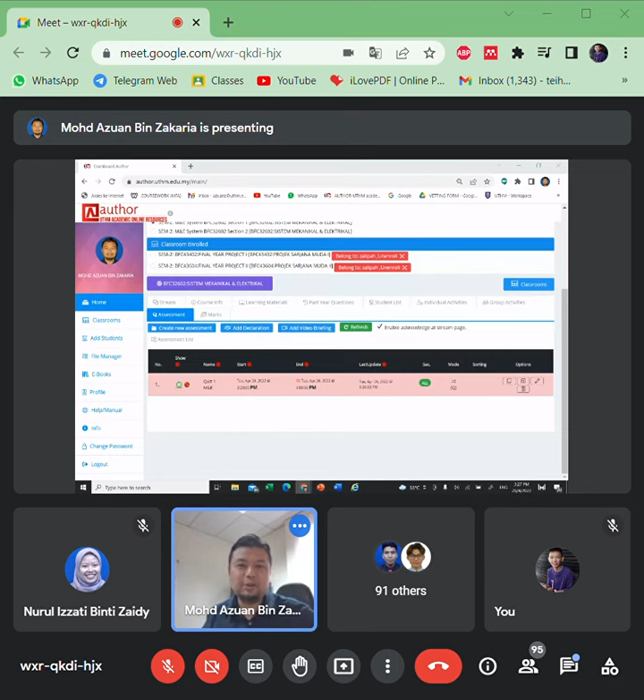Thank you, Doctor. Thank you, Doctor. Thank you, Doctor.